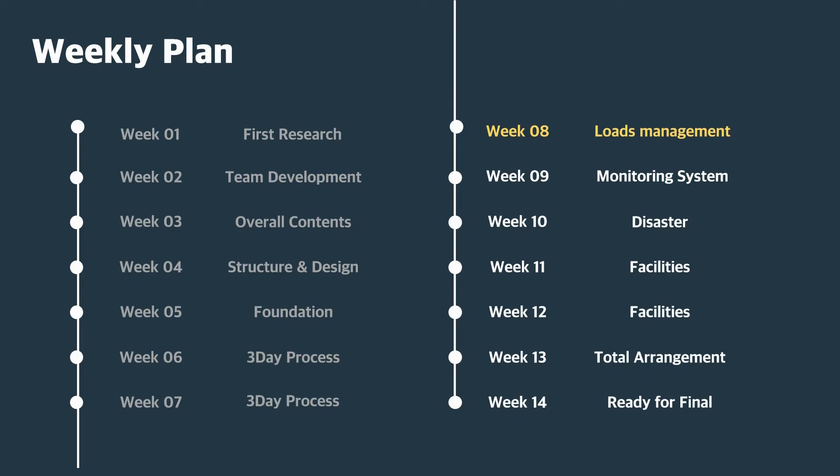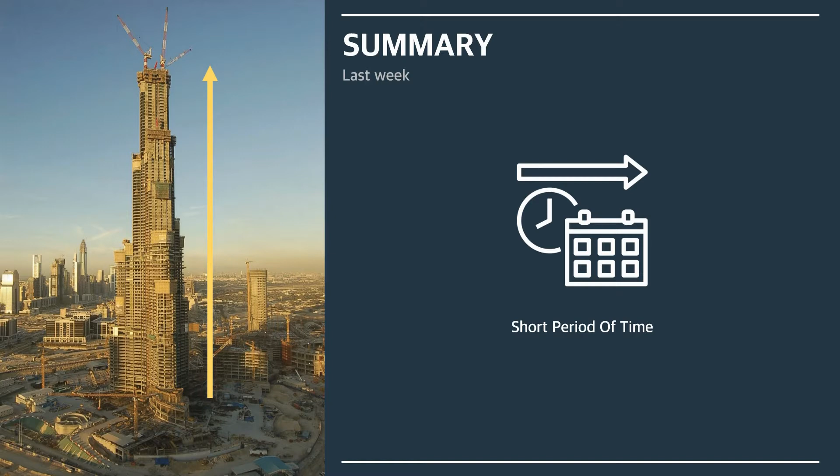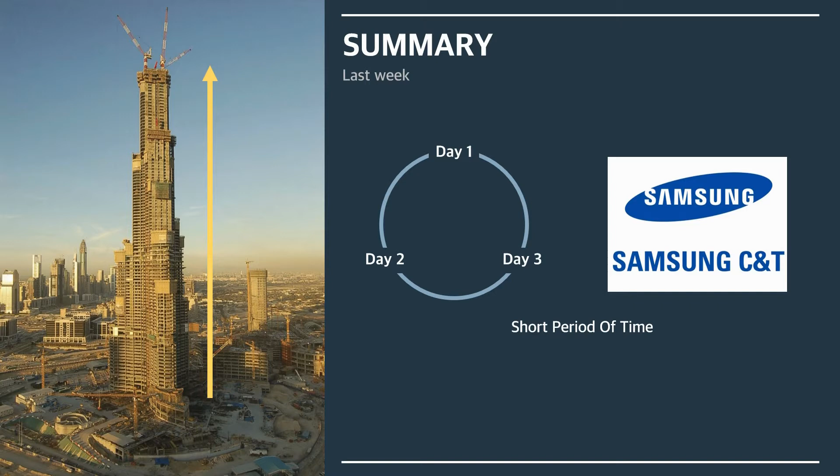From this week, we will present the problems during construction. First, we prepare for load management. In last week's presentation, we discussed the 3-day cycle. The key to the 3-day cycle was to shorten the construction period and obtain maximum efficiency within a limited budget. Samsung C&T Corporation, which was able to carry out construction meeting these conditions, was adopted as the main contractor and began construction of the Burj Khalifa.

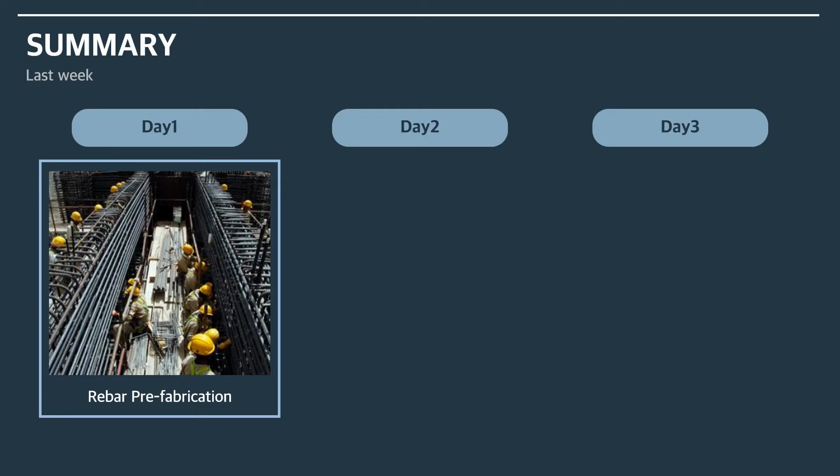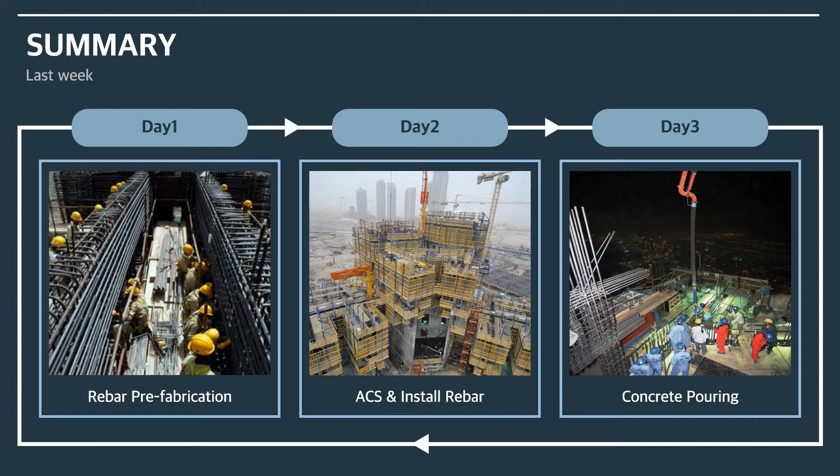This is a review of the 3-day cycle. Day 1, a rebar frame is prefabricated on the ground. The assembled frame is installed in the formwork on Day 2. Finally, concrete is poured on Day 3. After these 3 days, one layer is completed, and the cycle repeats starting again at Day 1.

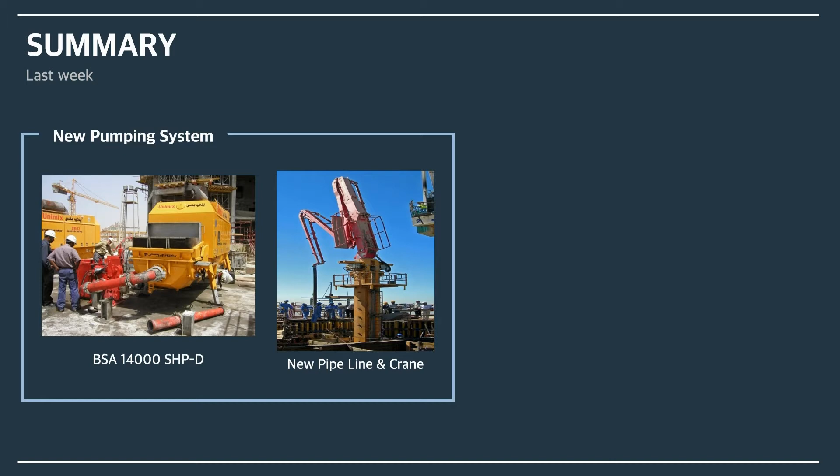To shorten the construction period, this project used a concrete pumping method. We also solved the workability problem by mixing different materials.

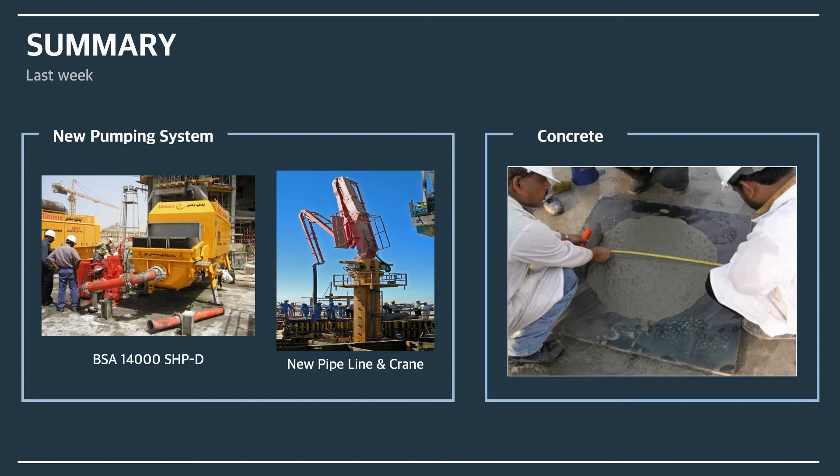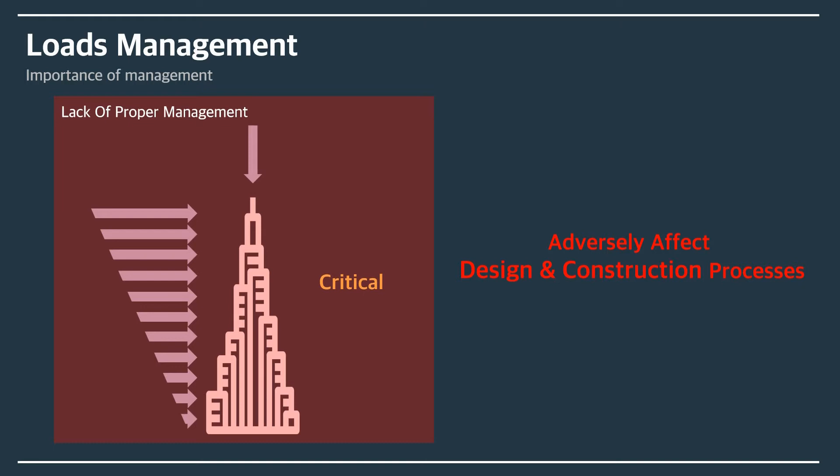In addition to the 3-day process, we will look into load issues during construction. The load on a building varies, so load management is an essential element in building design. This affects design and construction—if the load is not properly managed, there is a lot of complexity in the next process. In other words, load management requires a deep understanding of materials and structural systems.

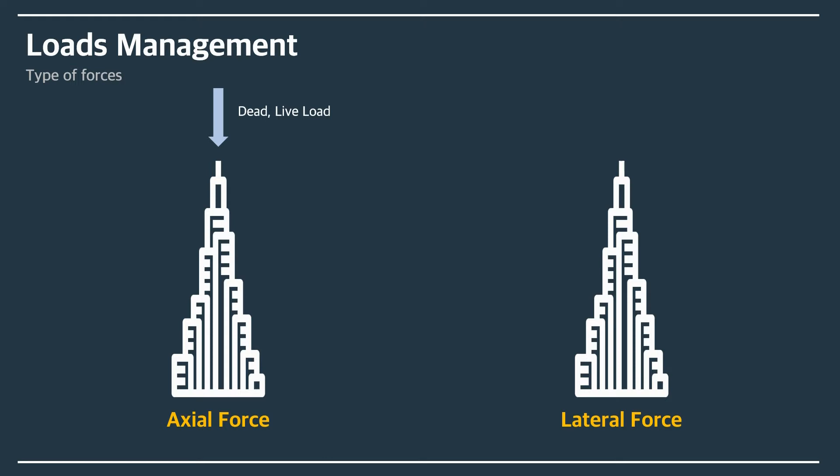The load measures to consider when constructing a high-rise building can largely be divided into axial force and lateral force. Axial force includes dead loads, live loads, and snow loads—in other words, forces related to gravity. Lateral force includes wind loads, earthquake loads, and impact loads. High-rise buildings especially need to manage wind loads.

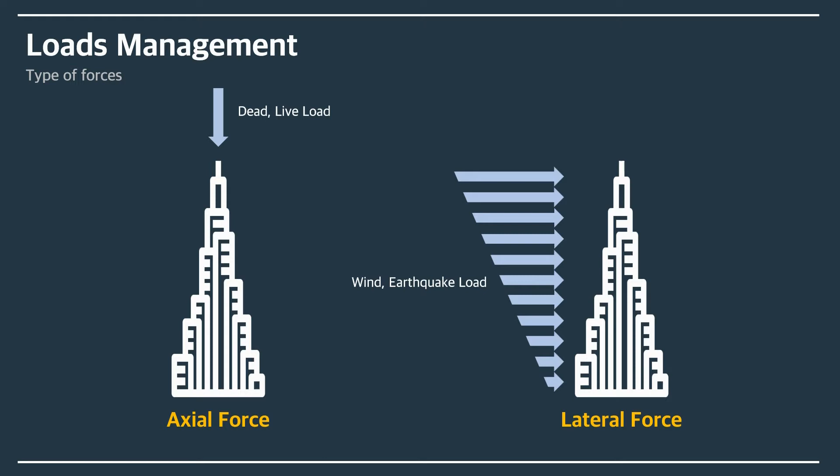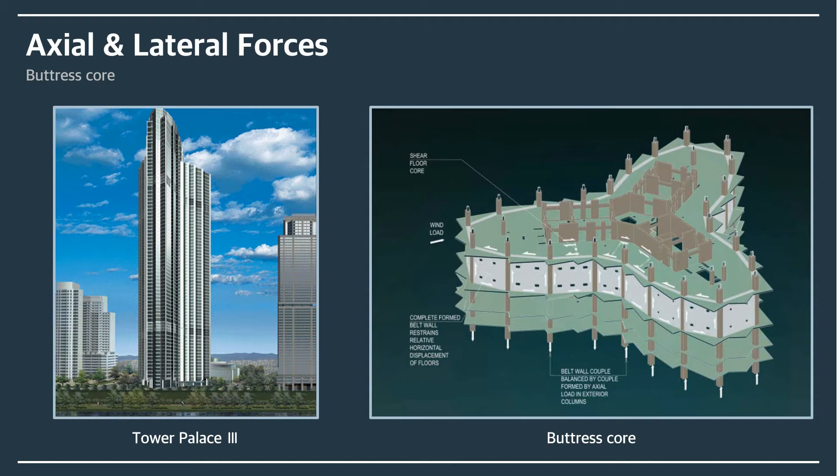A way to manage these loads was needed, so some companies had to find new management methods. Before constructing Burj Khalifa, buttress core, the latest technology used in Tower Palace III, was adopted and constructed in Korea. Interested in this method, some companies adopted and developed the buttress core used in Tower Palace for use in Dubai.

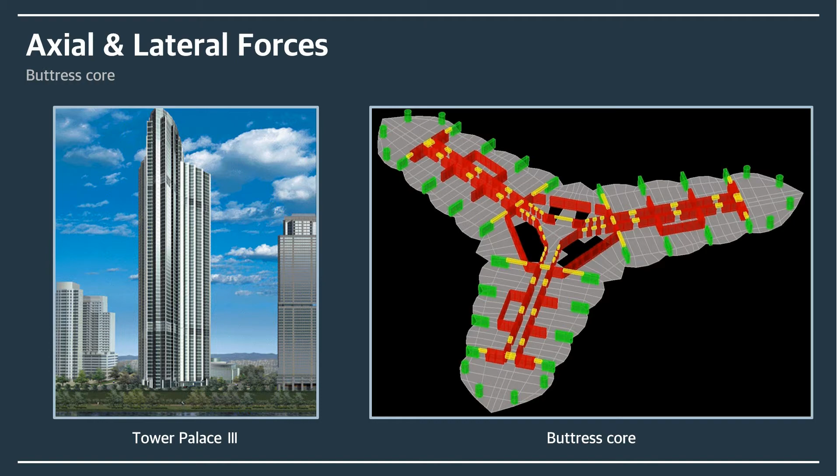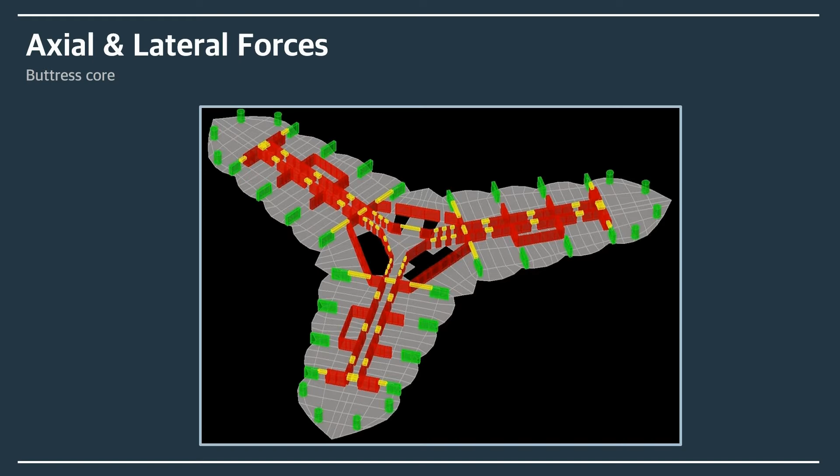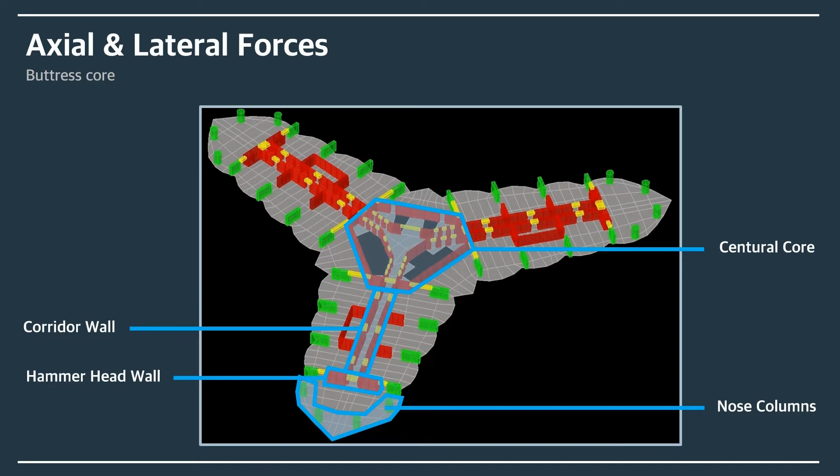So, what is buttress core? Let's look at this picture to understand. Buttress core consists of a core located in the center, a corridor wall connecting the hammerhead wall with the core, and a nose column connecting the vertical members. It also has the ability to resist both axial forces and lateral forces. Let's move to the next slide and see how each applies.

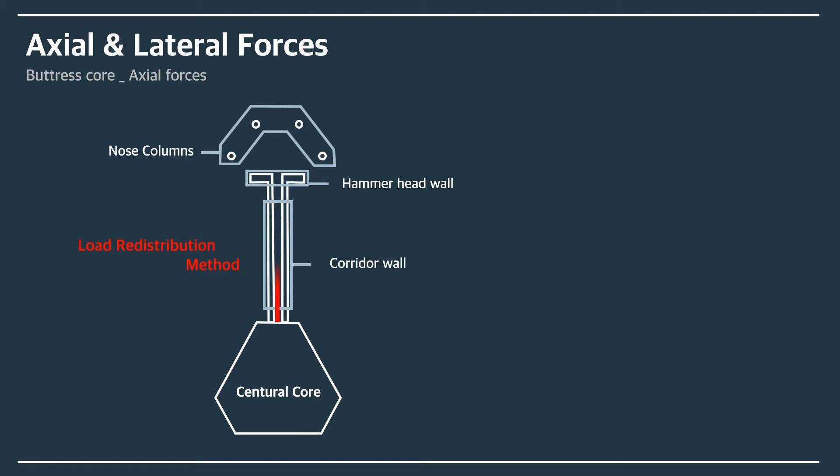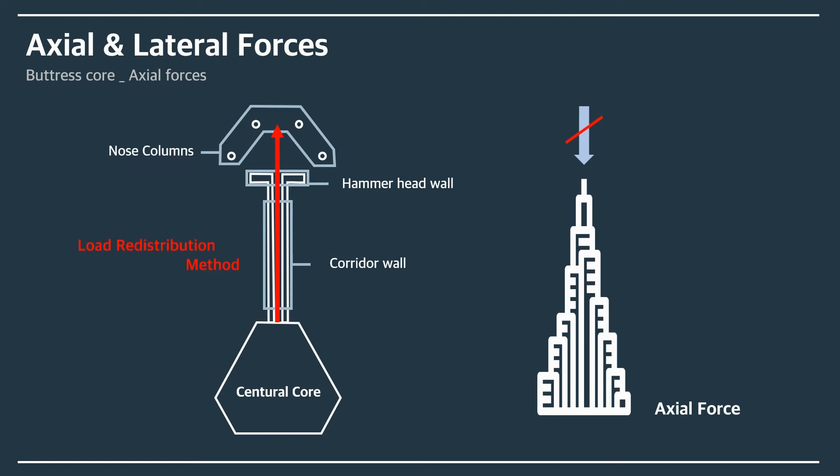Now let's see how the buttress core resists axial force. The buttress core is connected by a corridor wall to the central hexagonal core, the nose columns, and the hammerhead wall. Due to the extreme height of the building, a perimeter column structure was adopted. This is a direct outrigger. With this outrigger method, we adopted the load redistribution of the hammerhead wall and nose column. The load flows to the hammerhead wall and nose column along the corridor wall. This way, even as a skyscraper, the building can resist axial load.

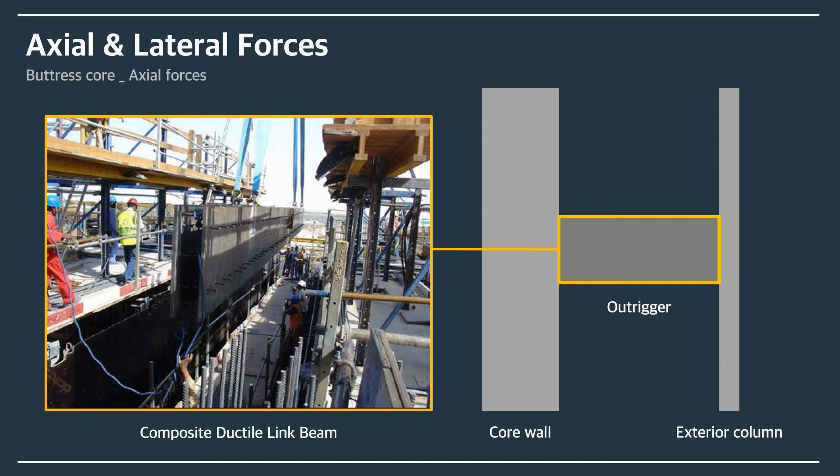In this slide, there is the rope outrigger. The outrigger used in Burj Khalifa is a composite ductile link beam. Not only is axial force present on the outer column connected to the outrigger, but flexure and shear force may also be caused by rotation of the outer end of the outrigger. When the outriggers are connected and load is applied to the outer wall, shear forces are induced in the outrigger to reduce the moment on the core shear wall.

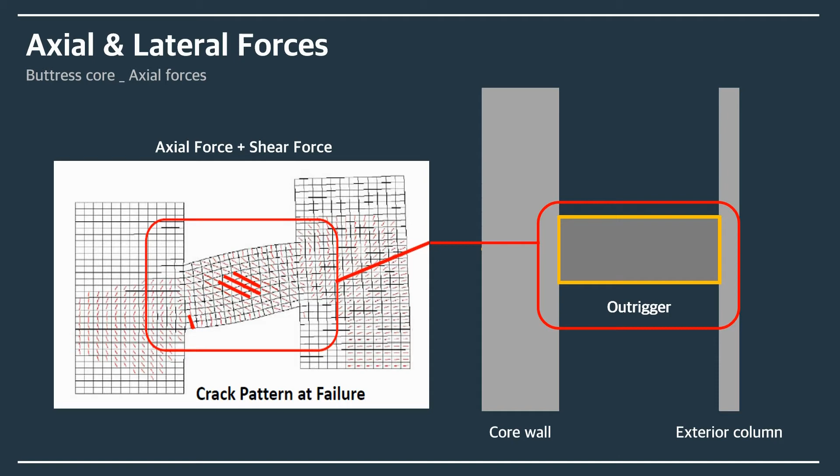In the previous slide, we presented how to resist axial force. This slide will show you how to resist lateral force. The representative lateral force is wind load, which increases in size as the height of the building rises.

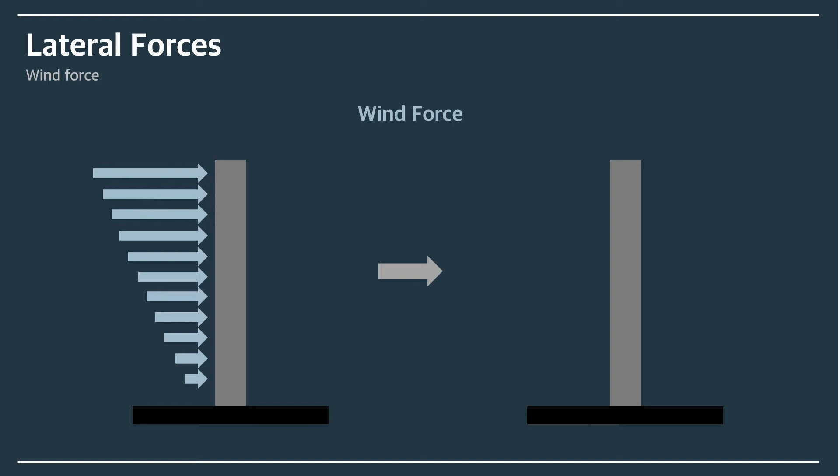Without a particular resistance method, shaking occurs in the direction of the wind. The techniques SOM came up with to resist this wind load are the exoskeleton and setback tier. Let's find out about each of them.

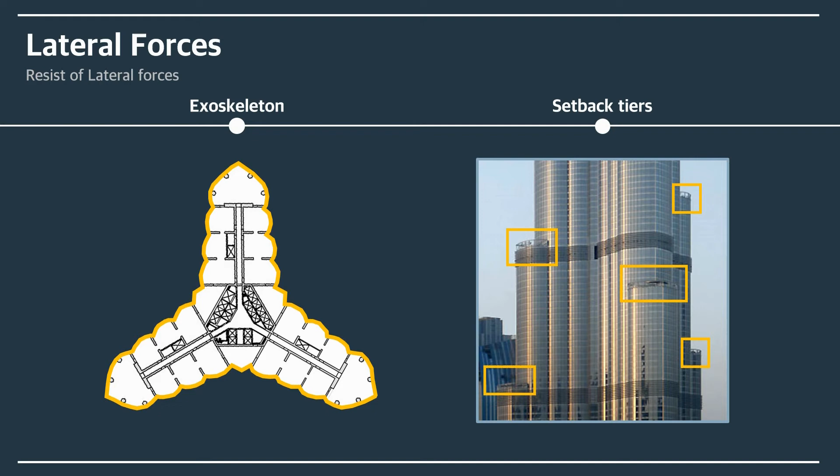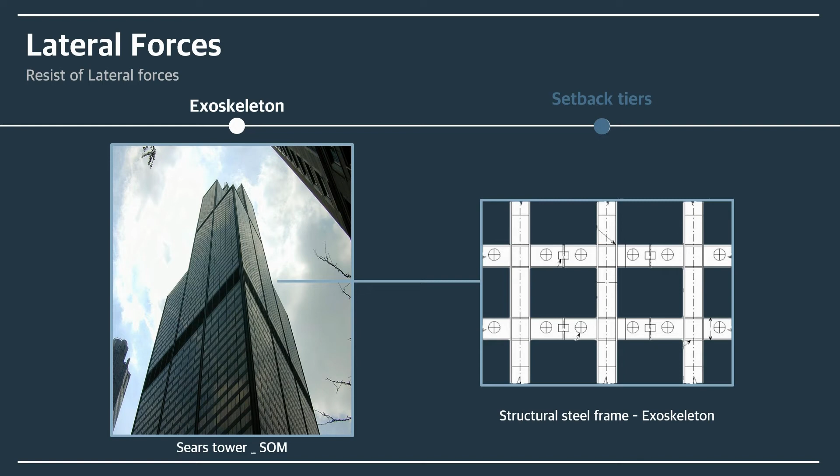There is an exoskeleton technique designed to resist loads in the Sears Tower, a 442-meter high skyscraper. Let's see a schematic description: the structural steel frame is pre-assembled into sections and secured with an exoskeleton to resist strong loads. This completed exoskeleton shows strong resistance from outside the building.

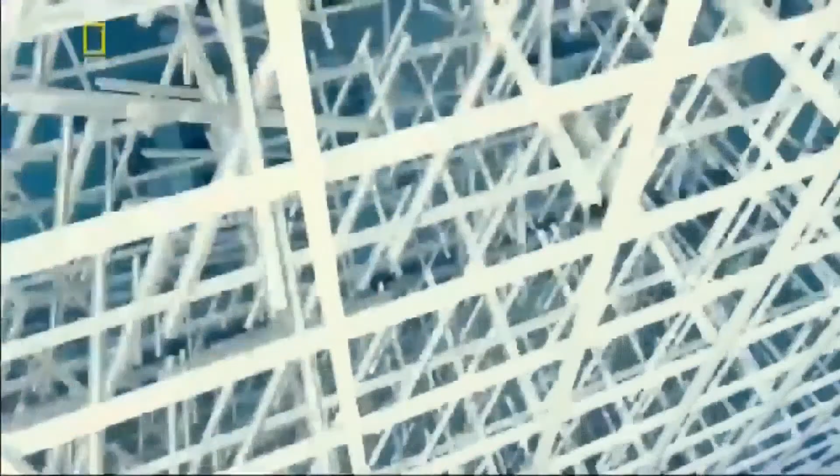Let's see this video. They shifted the steel framework from the inside of the building to the outside. The exoskeleton made it very hard for wind to bend the building.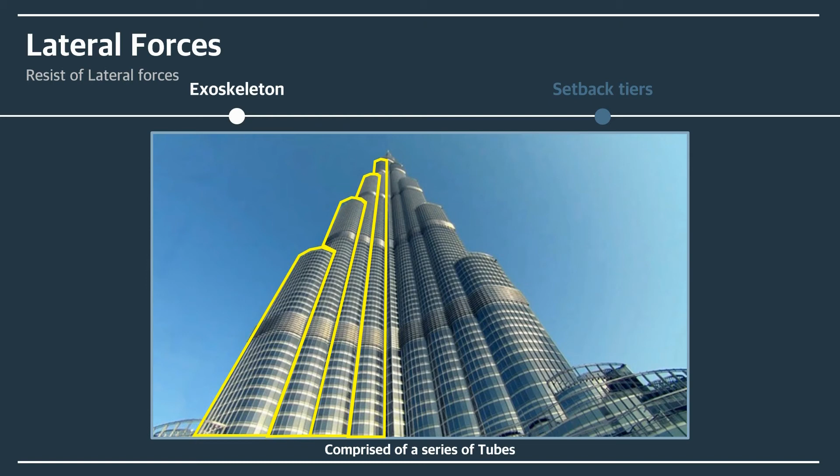This structure was applied to Burj Khalifa's exterior walls. The Burj Khalifa is comprised of a series of tubes that each have their own exoskeleton. However, Burj Khalifa, which was expected to double the height of the Sears Tower, was difficult to protect against wind load with just the exoskeleton structure.

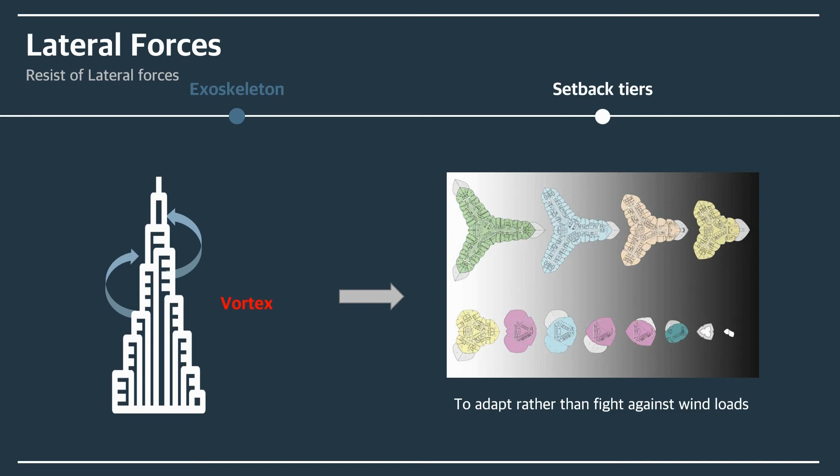There has been a series of exoskeleton structures, but the strong winds blowing on skyscrapers create a vortex in the leeward, causing the building to shake sideways. As a solution to this problem, the design team and structure team decided to adapt rather than fight against wind loads. Setback tiers refer to a spiral shape at the top of the building as the height of the building increases.

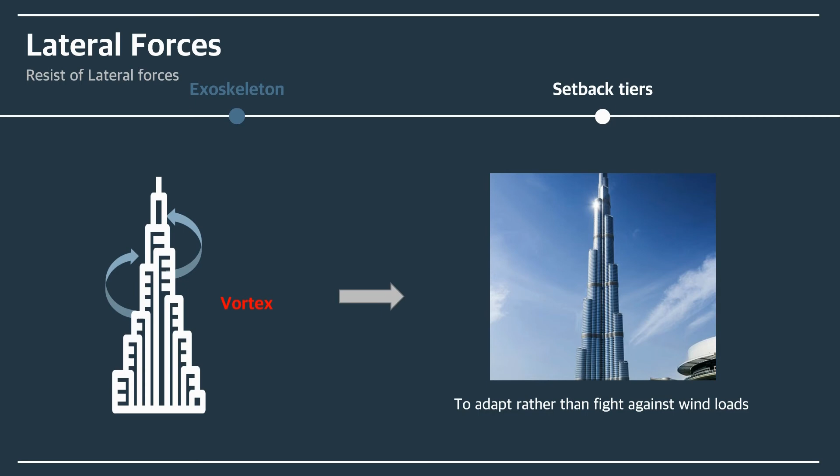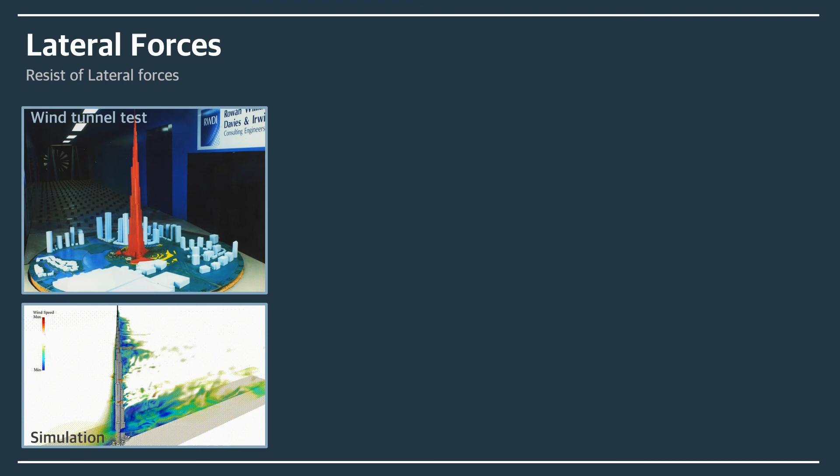That's how it was actually applied. By calculating and analyzing data through wind tunnel tests, the setbacks of three wings were determined to minimize wind power effects. By confusing the wind, this design induces a dishevelled spiral that scatters over the height of the tower. You can see the diagram under wind load as shown in the picture.

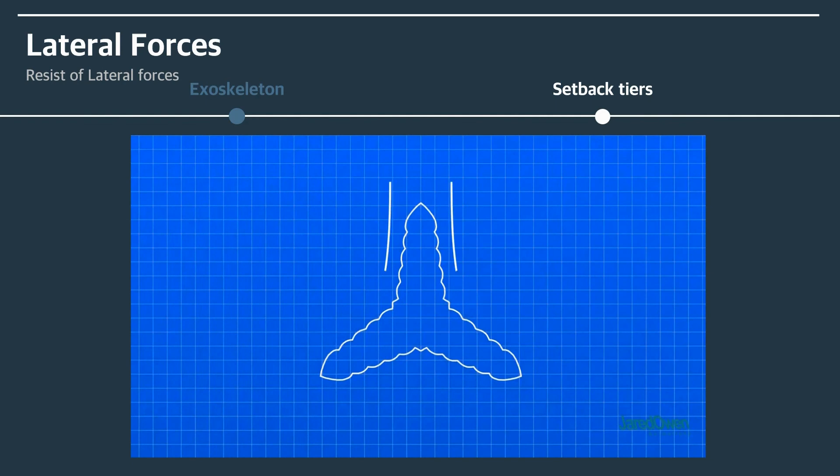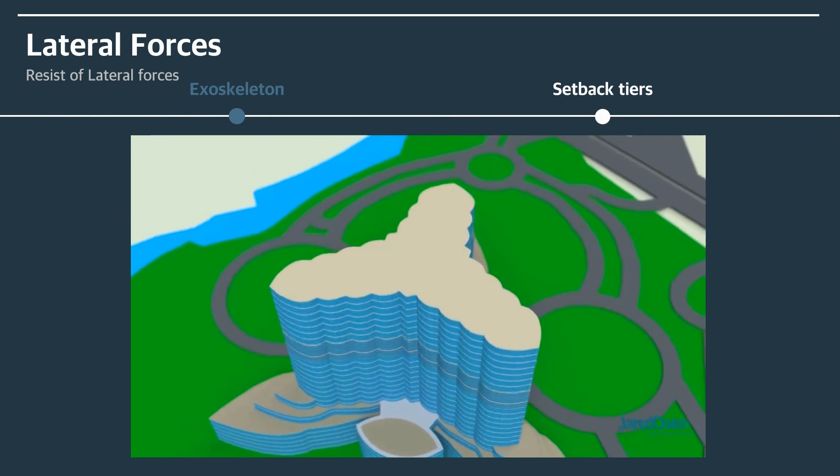It allows the wind to pass around it. We certainly wouldn't want the top of the building to sway in the wind. As the building extends upwards, one of the three sections will shrink in a rotating pattern, so this one, then this one, then this one - giving a spiral effect all the way to the top.

High-rise buildings such as Taipei 101 require a mass damper to control wind loads. In the case of Burj Khalifa, the setback tier is shaped spirally to reduce the shaking caused by the vortex. Therefore, there is no mass damper, which helps space utilization and reduces building loads.

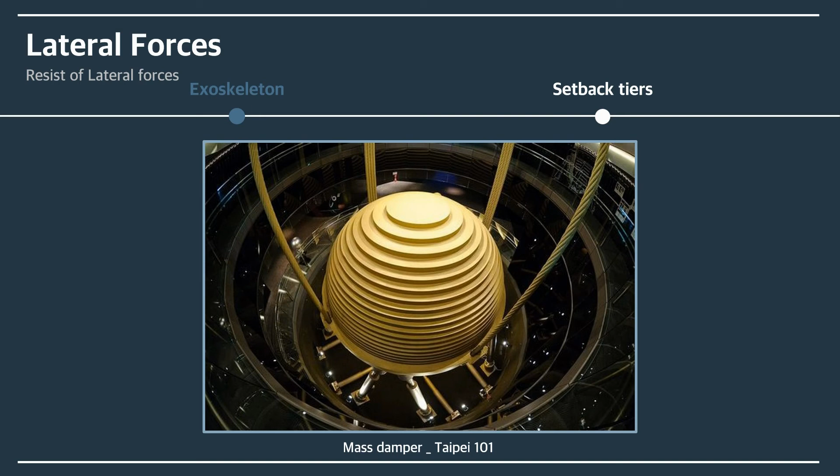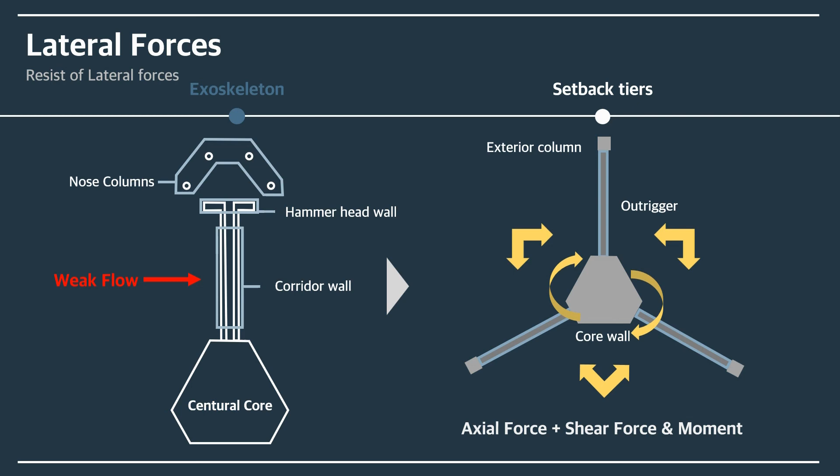In other words, by connecting the top and bottom of the outrigger to the outer column, we were able to effectively resist not only the axial force, but also the shear force and the moment.

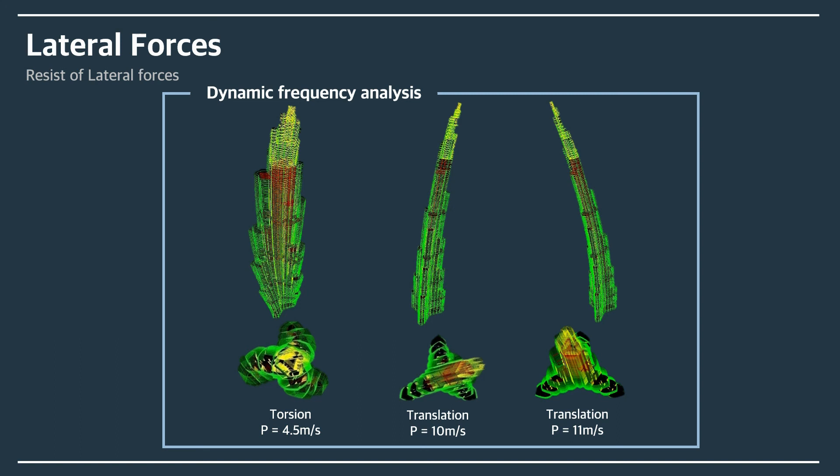You can check the dynamic frequency analysis that occurs when the wind force is 4.5 meters per second, 10 meters per second, and 11 meters per second. These tests and simulations have confirmed that Burj Khalifa is a building safe from wind loads.

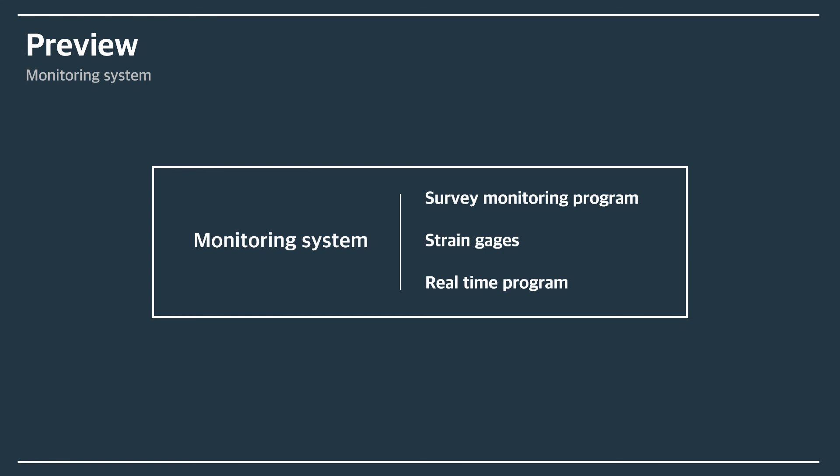It is novel that such a structure system was included in the design, but the building plan of the tower was very difficult in every way. Therefore, monitoring programs for the condition and structure of buildings had to be implemented. So next week, we will learn about the types of monitoring systems and how they work.